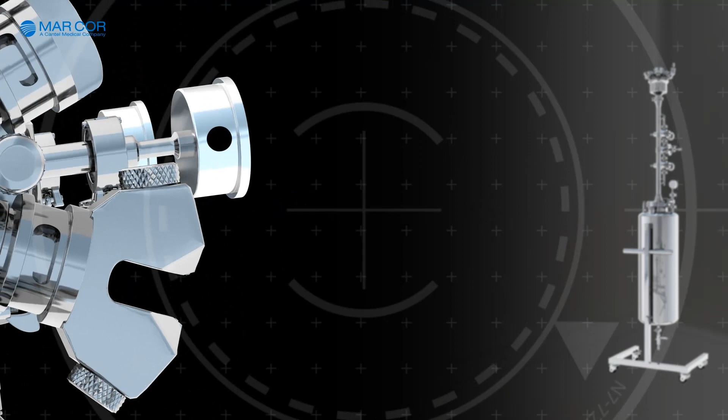Dry Fog 2. Better, faster, and easier to use. Dry Fog 2, the most advanced technology for cleanroom bio-decontamination from Mar Cor Purification.

The Dry Fog technology is used to effectively bio-decontaminate cleanrooms, CRABs, locks, isolators, biohazard cabinets, and animal rooms.

Dry Fog 2 consists of a 0.2 micron hydrophobic PTFE sterilizing grade air filter to filter compressed air, a multi-directional Sterilant diffuser head to spray at various angles, a stainless steel 316L decontaminant tank to hold the Minncare solution, and a rigid and durable stainless steel trolley for easy portability.

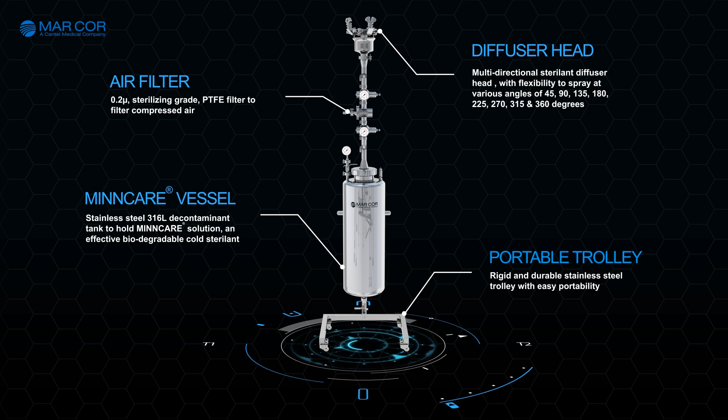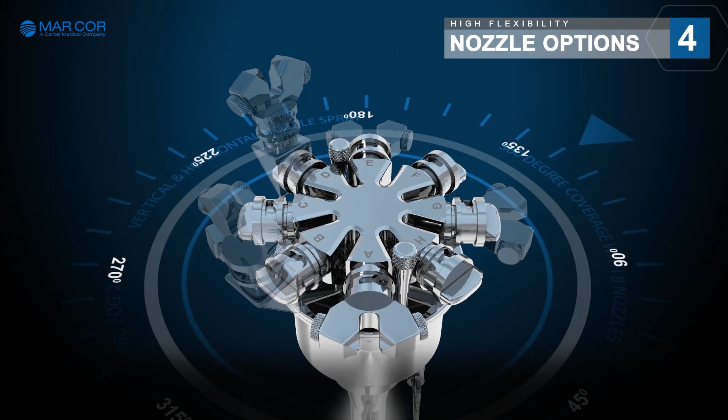Dry Fog 2 provides high flexibility with the option of fitting up to 8 nozzles for complete 360-degree coverage. Nozzles can be fitted to spray in the horizontal as well as in the vertical direction.

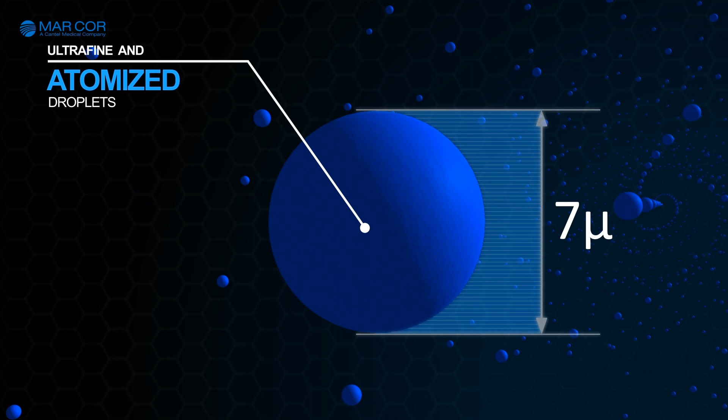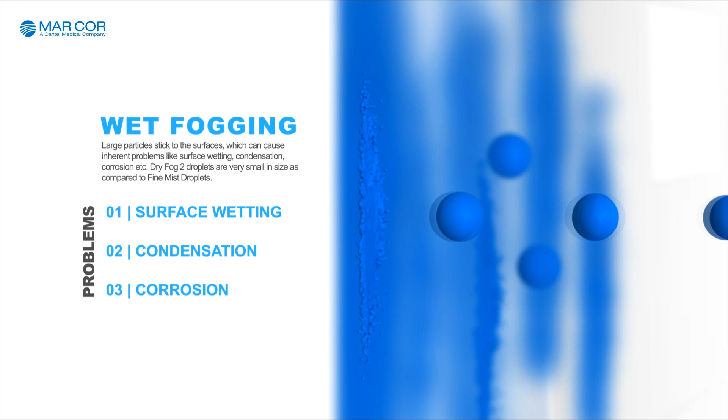The ultra-fine and atomized droplets being ejected from the nozzles are very small, with an average diameter of only 7 microns. Wet fogging is a phenomenon caused by large droplets. Large droplets tend to stick to the walls, causing condensation and corrosion.

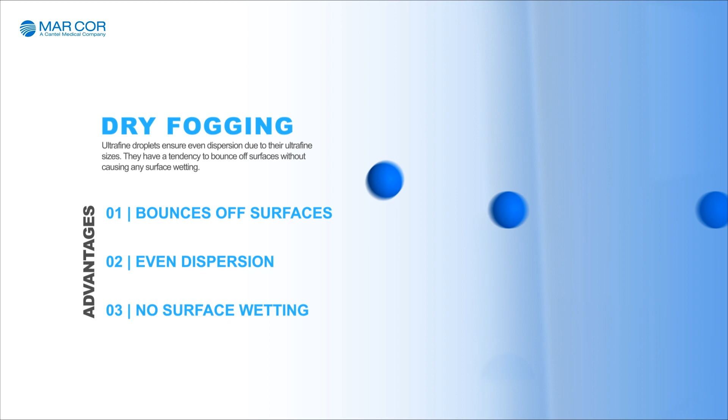Because of their size, the atomized ultra-fine droplets of Dry Fog 2 bounce off the surfaces without causing any surface wetting. This also results in even and uniform dispersion of the Sterilant across the room. As a result of this, they can penetrate into difficult-to-access areas and crevices easier and faster.

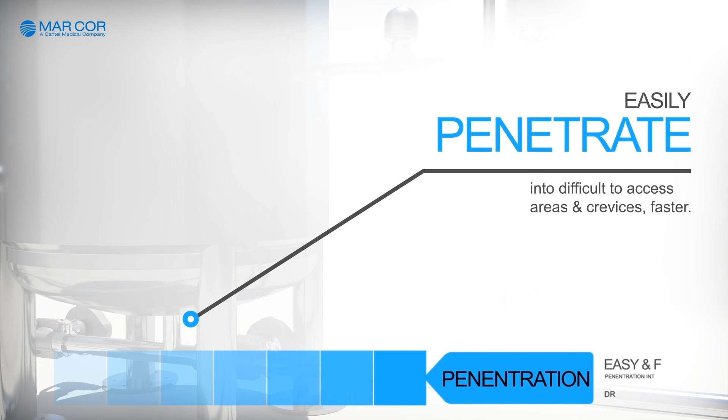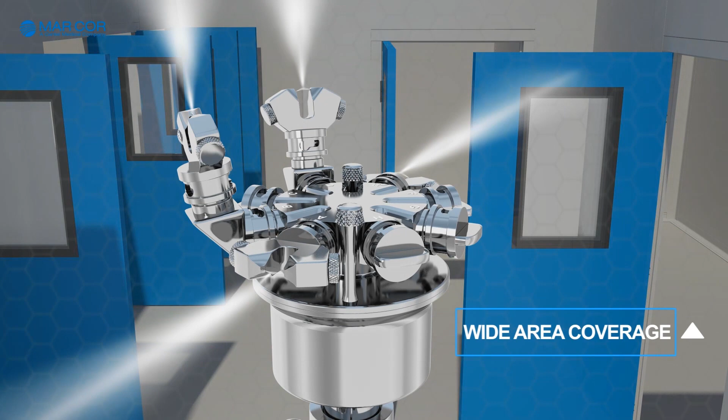Dry Fog 2 has a wide coverage range up to an area of 1,000 cubic meters and can be easily used to disinfect large areas, or placed in a corridor with all the room doors open to disinfect multiple rooms at once.

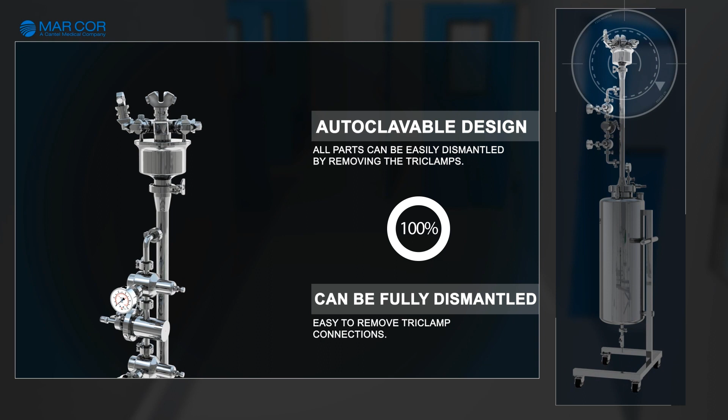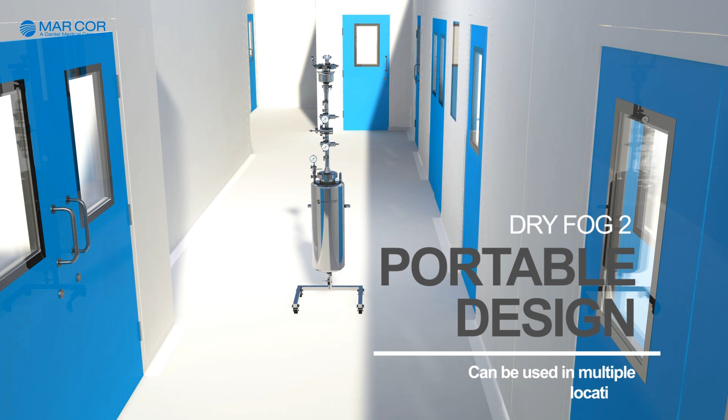Dry Fog 2 can be autoclaved and can be fully dismantled as it's designed with easy-to-remove tri-clamp and bayonet connections. Dry Fog 2 features a trolley-mounted design for easy portability and can be easily moved to multiple locations.

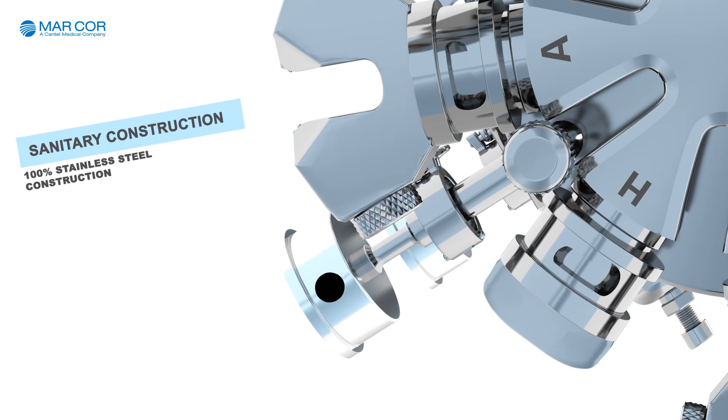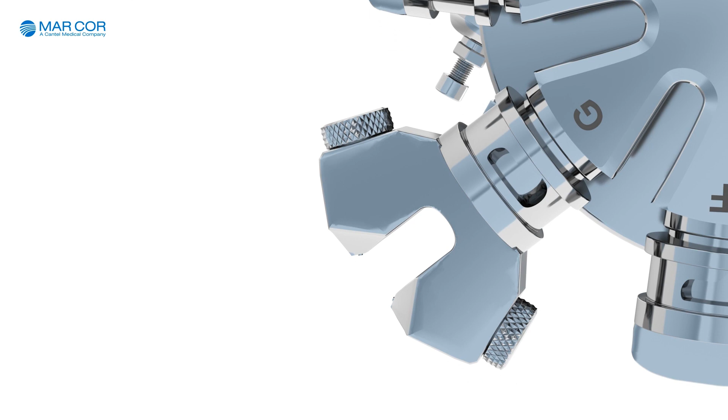Dry Fog 2 features a fully sanitary design with 100% stainless steel construction, very easy to maintain with no moving parts, and operates with only compressed air. Validated procedures, reproducible as per international pharma standards.

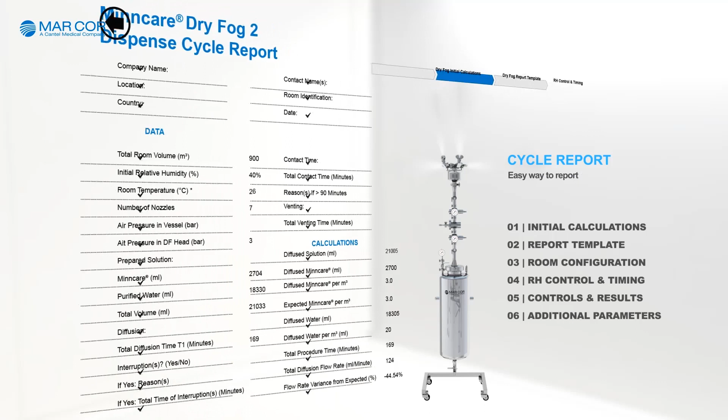Dry Fog 2 comes with various easy-to-calculate spreadsheet templates. These templates help to determine the quantity of Minncare and water to be used, report the decontamination process cycle, relative humidity control and timings, etc.

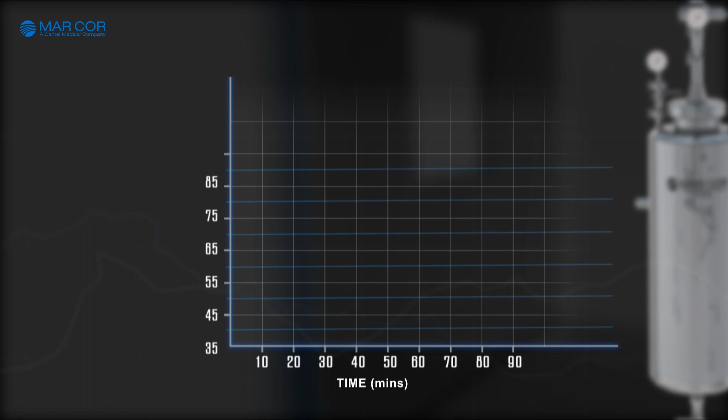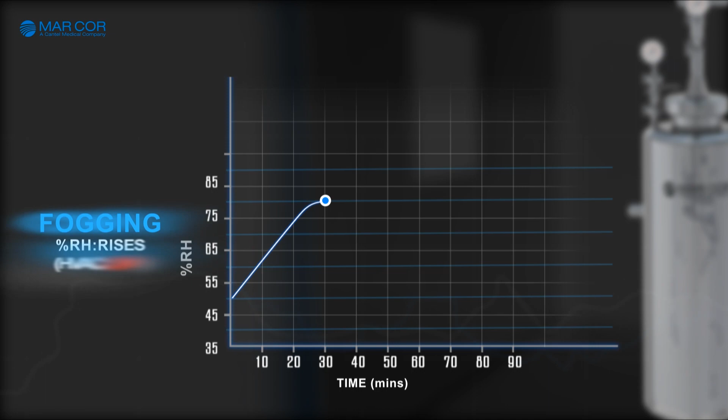In the beginning of the decontamination process, the HVAC is switched off and the spraying begins. After 30 to 60 minutes, the spray stops and the relative humidity reaches about 80%. The disinfectant is now allowed to be in the room for around 60 minutes. This phase is known as the contact phase. The HVAC remains switched off.

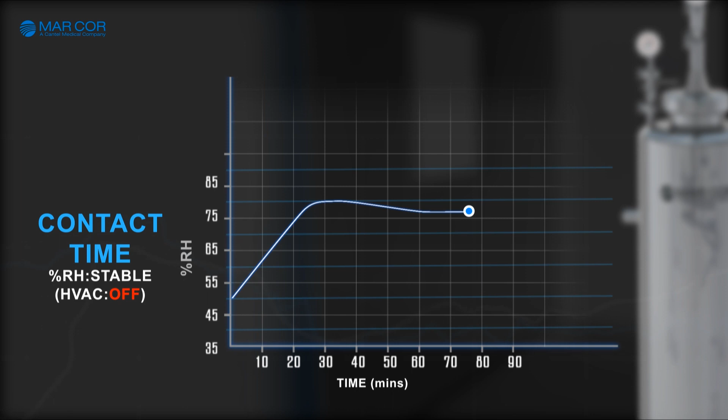After 60 minutes, the HVAC is switched on, and the relative humidity falls back to the starting levels. This phase is called the venting phase. After venting, the room can be used again with no need for additional surface cleaning.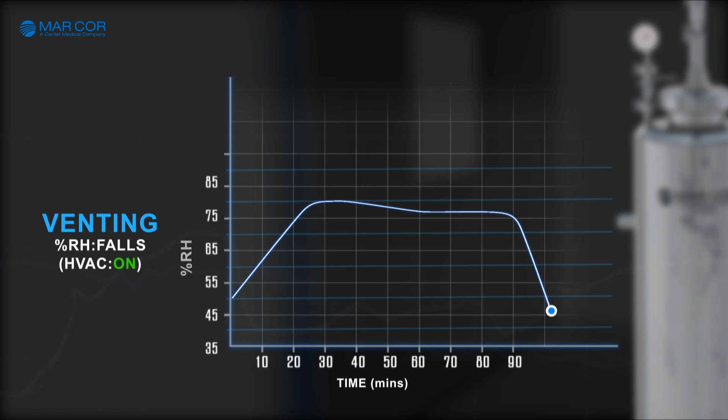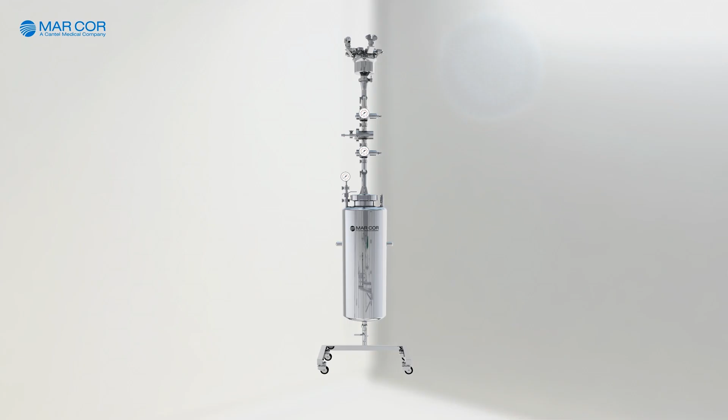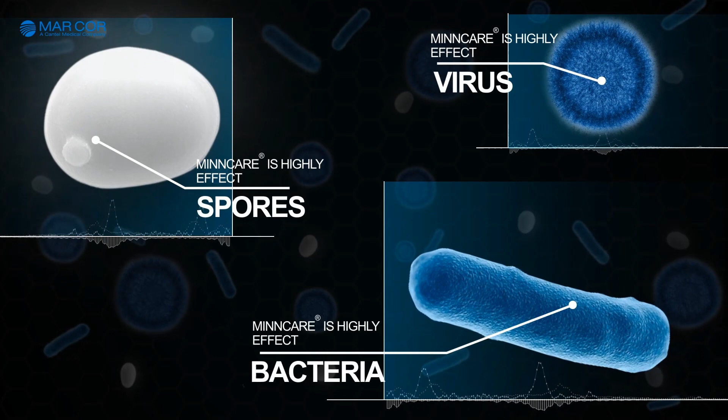The advantages of Minncare Cold Sterilant are: fully biodegradable, uses only pharma-grade materials, and much less corrosive than other chemicals or formulation vapors. Effective against all microorganisms, including bacteria, spores, and viruses.

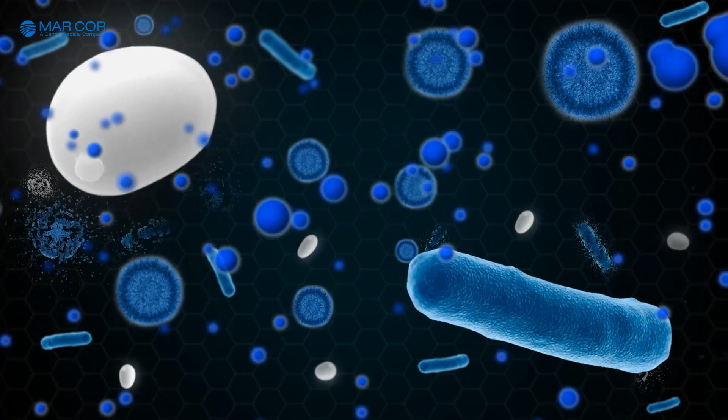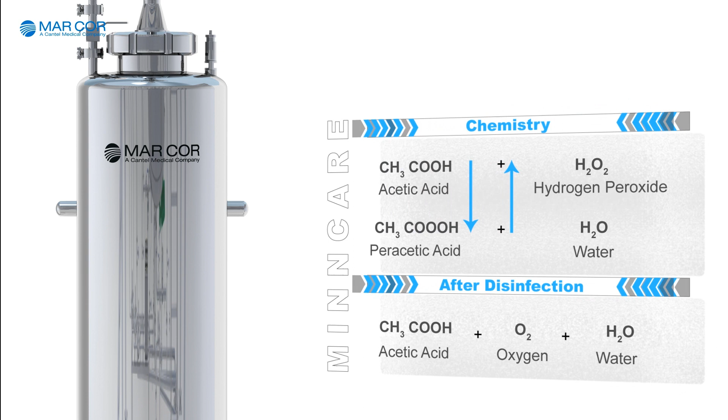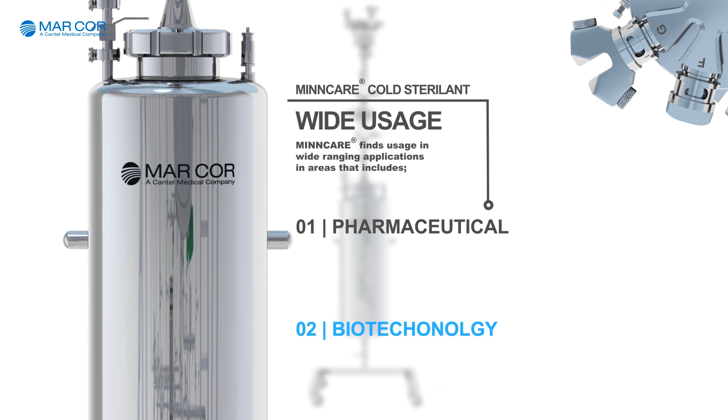This equation explains the chemistry behind the effectiveness of Minncare Cold Sterilant. Minncare Cold Sterilant is widely used in pharmaceuticals, biotechnology, animal research facilities, medical device manufacture, and hospitals.